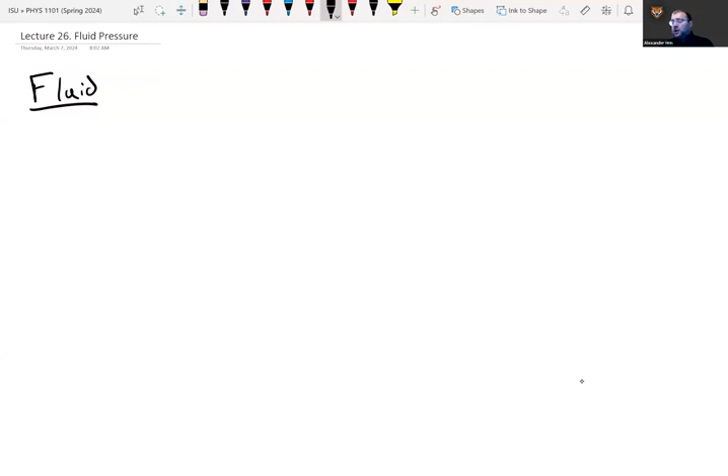A lot of people, when they hear the term fluid, what they think is liquid. Really, what it is, is liquid or gas. What a fluid generally means is that it engages in fluid flow. Basically this means it's matter that can rearrange its shape in order to fill the container, and when it moves, it rearranges its shape to move in whatever way possible. So its motion and its equilibrium have to take into account the fact that the matter can effectively change shape very easily. In fact, it changes shape in response to forces, and this has various implications in terms of the different kinds of fluid flow and fluid behavior.

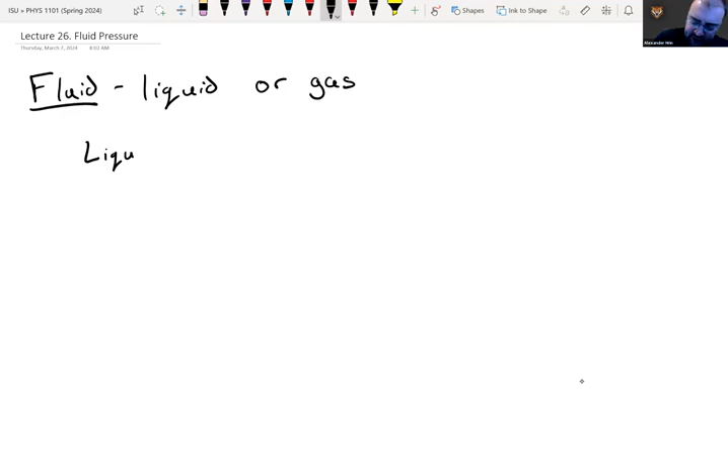So think about it this way: you have say a basketball. You can kind of keep pumping air into that basketball, and basically what you're doing is compressing the air to pump it in. If you've ever completely overinflated a ball, you know that eventually you can rip the ball apart. Now, if you tried to force water into that ball, you would basically fill it up until it was full of water, and you would not need very much more water to completely rip the ball apart. The idea is that you can force more air into the same volume—that's what it means to compress it. You can't really do that with water, okay?

That's in general the distinction between liquids and gases in fluid terms. When you think about liquids and gases, you probably have a better idea—liquids are heavier than air, and so they sit below any gases. Now, you can have some very dense gases, which can be interesting, but in general, liquids are more dense than gases, and we'll get to density in just a moment.

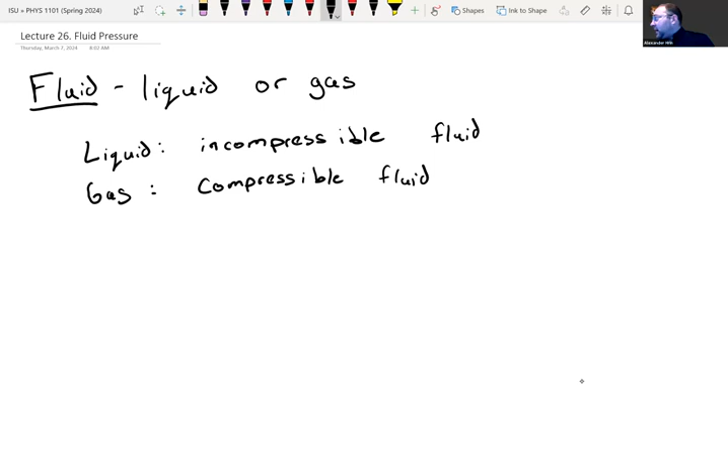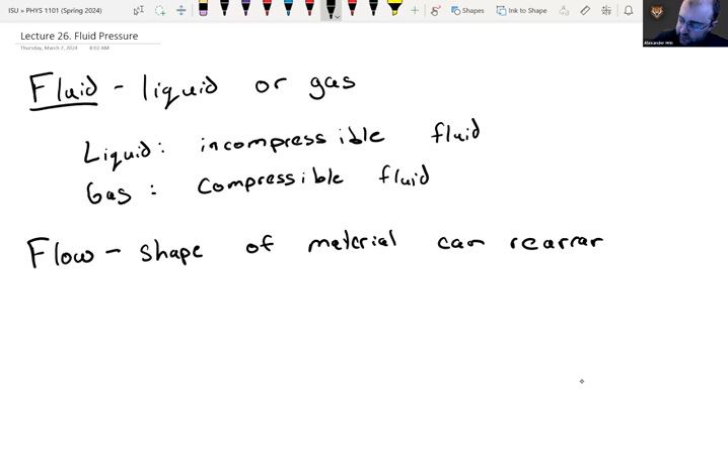So again, the idea is that both of these things flow, and the whole idea behind flow is that the shape of the material can rearrange to move, broadly speaking, to equilibrium. The idea here is that if we have a solid object, its shape can't rearrange, so it'll just sit there. Imagine your computer, it just sits on the desk. It keeps its shape—it's got forces on it, but the forces holding the shape together are stronger than anything that wants to rip it apart, like gravity or a normal force.

In the case of a liquid, that's not true. If you pour a liquid out of a cup, it doesn't stay the same shape as the cup—gravity basically flattens it all out. Same thing occurs with gases. You can see this sometimes if you go to the freezer aisle in a store, and you can see the cold air is kind of misty. You open the freezer, and you get a whole bunch of cold air that is actually visualizable, and that cold air will just flatten out along the ground.

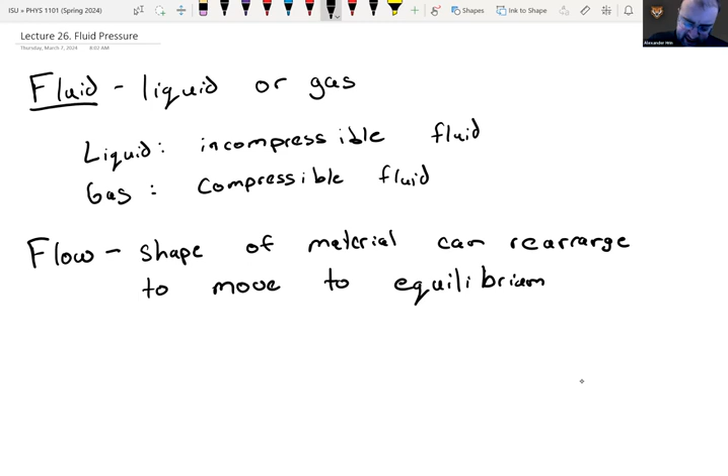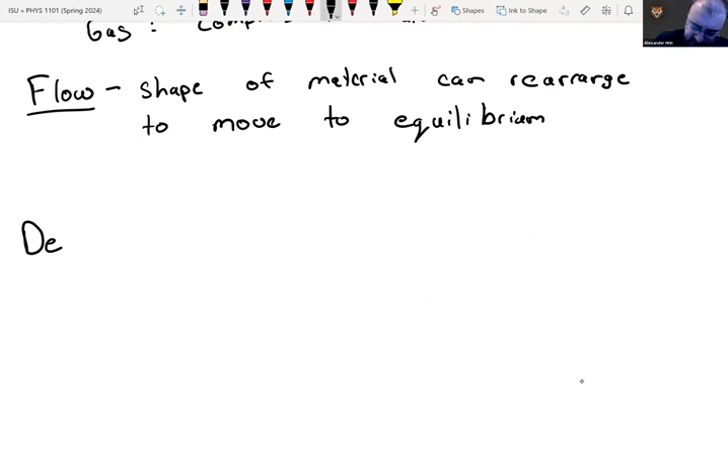Okay, so again, changing its shape in order to reach some equilibrium point—this is what fluids can do. As a consequence, a lot of the physical laws we learned about motion of solid objects we need to rethink and reconceptualize in terms of something that works for fluids. Now, we're going to need to define some new concepts that are going to keep coming up in fluids, and that's largely what's going to happen today. The first one is density, and perhaps you may be familiar with this—because a particular fluid can always change its shape, a lot of times it makes more sense to refer to the density of the fluid rather than the mass of the particular fluid, okay?

Because this fluid can change its shape, it can break apart, it can do whatever, the density is going to stay constant even if the fluid changes shape or spreads out. But what we can do is characterize the density of a fluid in a way that's a little more difficult to do for a mass, because a solid object's matter coheres together, so we can talk about the mass of that object, and also the density, but mass tends to be somewhat more effective.

Density is mass per unit volume. We talked a bit about this when we discussed drag, where the density of the fluid came up. Drag is a force that enters into fluid flow really, and we discussed it in the context of mechanics, but really people started analyzing drag once they understood a bit more about fluid mechanics instead.

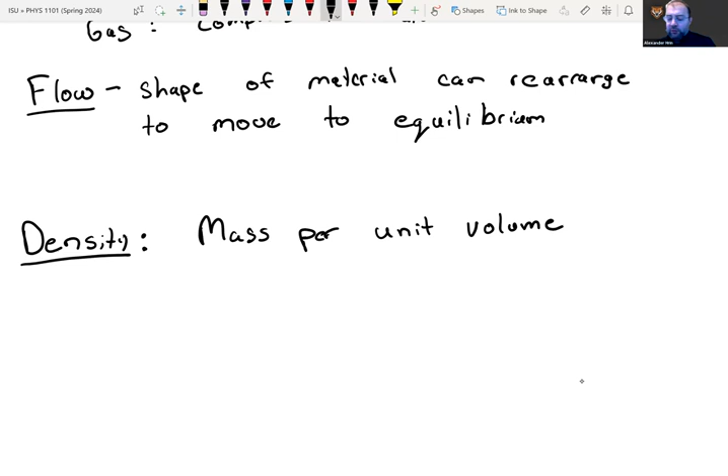So mass per unit volume, the symbol is this kind of weird looking P - that is the Greek symbol rho. A lot of times you'll have a subscript to indicate what it's the density of, but in general it's just this weird looking P. I'll try to put a tail on it to show it's not exactly a P. It equals mass divided by volume - that's not velocity, it's volume, supposed to be a capital V. Capital V's and lowercase v's look identical unless you're looking at a textbook, which is one of the things that can tell you it's a textbook. But if you're writing it, a lot of times they look identical. This is volume, so mass and volume.

Now the SI units are kilograms per meter cubed.

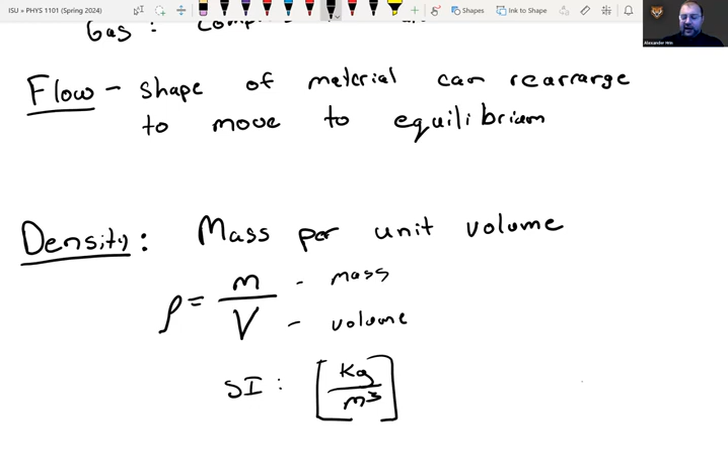This is SI, and one thing you need to be aware of is that a lot of times you won't be given SI for density. The reason is a meter cubed is a very large volume of something - particularly in the context of chemistry, that didn't come up a lot, you weren't dealing with entire meters cubed. If you imagine a meter cubed, it's a cube with a meter on each edge - that's a pretty big volume. We can deal with that, but it turns out a centimeter cubed is more common.

Now, a centimeter cubed is 1 milliliter - I'll put this off to the side. 1 centimeter cubed equals 1 milliliter. That is a conversion to know. Another common conversion to know is that 1 meter cubed is equal to 1 million centimeters cubed, or 1 times 10 to the 6th centimeters cubed.

And you're like, wait a minute, there's 100 centimeters per meter. Well, that's true, but if you imagine that meter cube on each edge and you divide each one of those edges into 100, basically the number of centimeters cubed that fit into that giant cube - you'll have 100 along one edge, 100 along another edge. That means 100 times 100 just on the bottom level, and 100 times 100 is 10,000. So just on the bottom level you have 10,000 centimeters cubed. But then you need a stack of 100 of those levels.

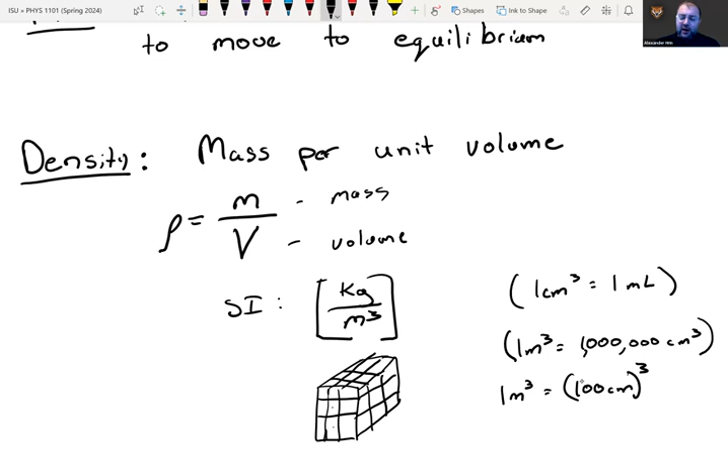One density I want you to be aware of, a very common density - this is actually how I think a gram was ultimately decided, because water is so common. I think a meter was decided another way, like some fraction of the distance from Paris to the North Pole. But a gram was decided in such a way that the density of water is equal to 1 gram per centimeter cubed.

That's the density of water, just to make that clear. Now, another conversion factor to know, since you're given things in grams per centimeters cubed, I'm going to convert this to kilograms per meter cubed, because kilograms per meter cubed is the SI unit. In a lot of SI applications, if you want to use density, you've got to convert to that. So know how to do it - it's not that hard. I just want to convince you of what's going on here.

So we'll do this conversion first. We have 1 million centimeters cubed per meter cubed, so basically this would be 1 million grams per meter cubed. But we also have a kilogram equals 1,000 grams, so we can change that as well. This 1,000 cancels out with 3 of those zeros. The grams cancel, the centimeters cubed cancel with the centimeters cubed - whoops, I canceled the meter cubed, I did not want to do that. Then we just have kilograms and meters cubed, and that would just be 1,000 kilograms per meter cubed.

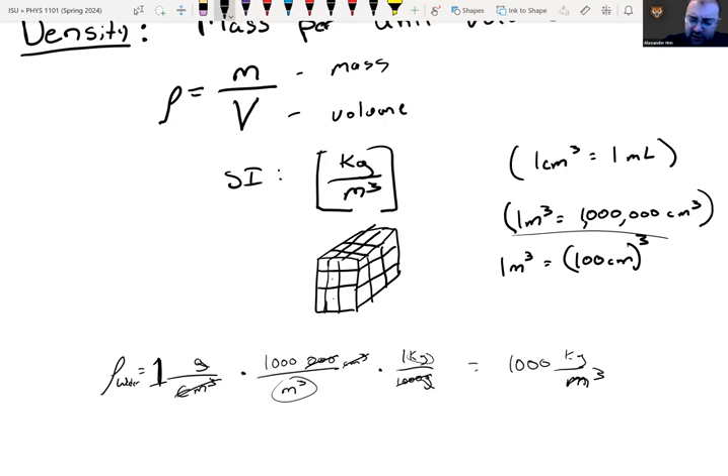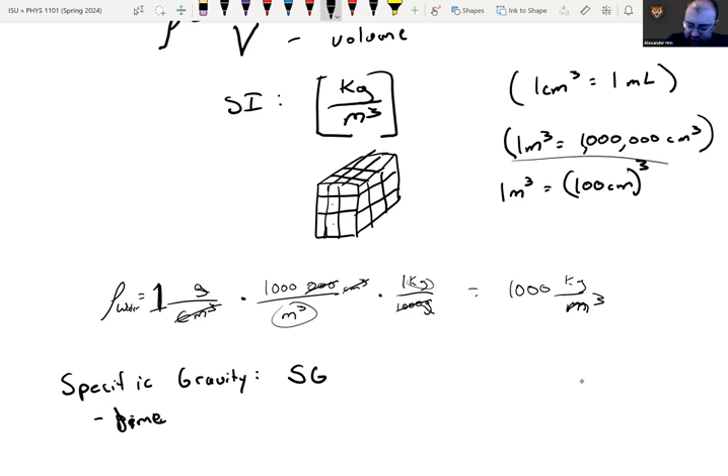So in any event, that's the conversion factor. Now, one other thing to talk about in this context is something called specific gravity. This doesn't really have a symbol - it will sometimes be given as just SG. Really, it's a dimensionless way of expressing density. Basically, the specific gravity of any fluid or object - say the specific gravity of X, where X could be anything - is equal to the density of X divided by the density of water. The nice thing about this is that the specific gravity is just the density of the material in grams per centimeters cubed with no units. So you can always find a specific gravity - it's a comparison of an object's density to the density of water. The reason this is often useful is that knowing the specific gravity, knowing how it compares to water, will actually tell you if something floats. I don't think this is going to come up much in the problems we're going to do, but it's worth knowing, so I'm going to include it.

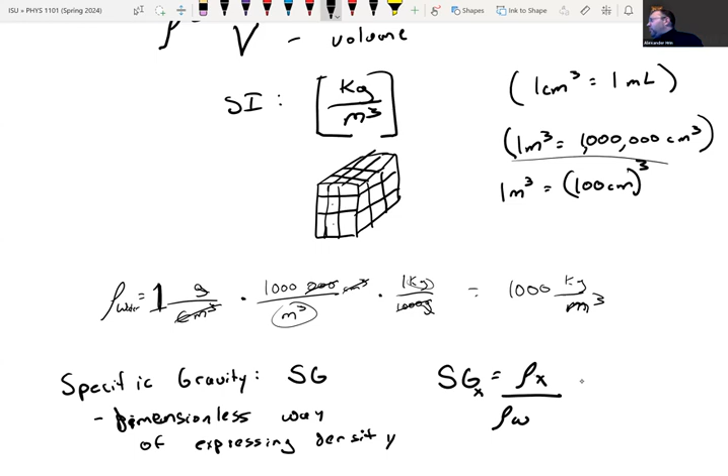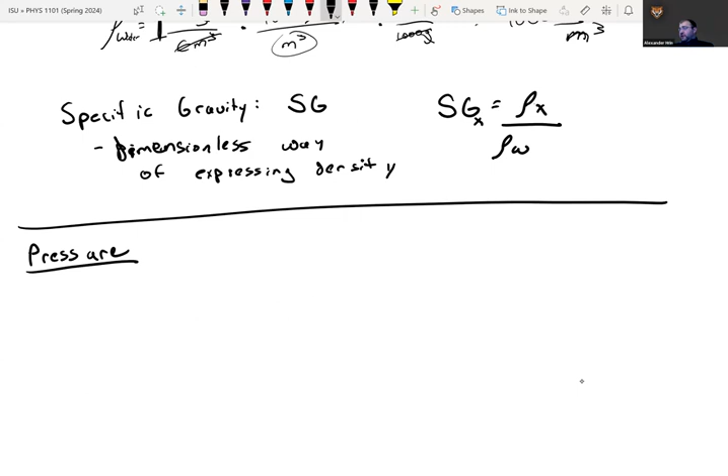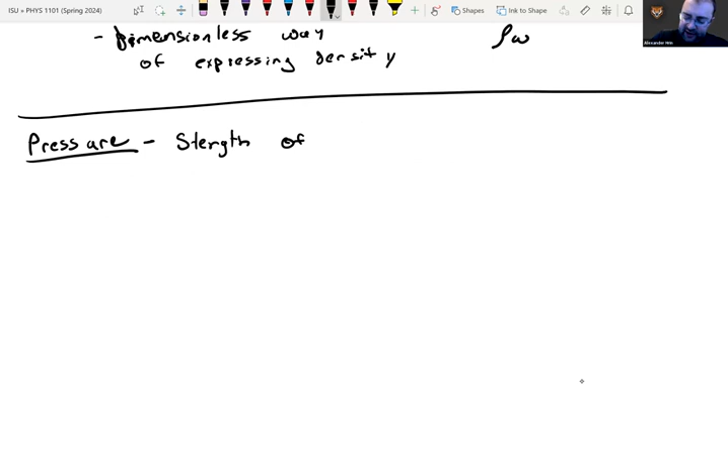All right, next concept I want to talk about is pressure. Pressure has a number of different ideas behind it - it's first relevant towards fluids, and then we can start thinking about it as a general application of forces. So when I introduce the concept of pressure, you've probably seen measurements of pressure before, but you might not have a very clear definition of what it is. The way I like to think about it, it is the strength of the push from a fluid.

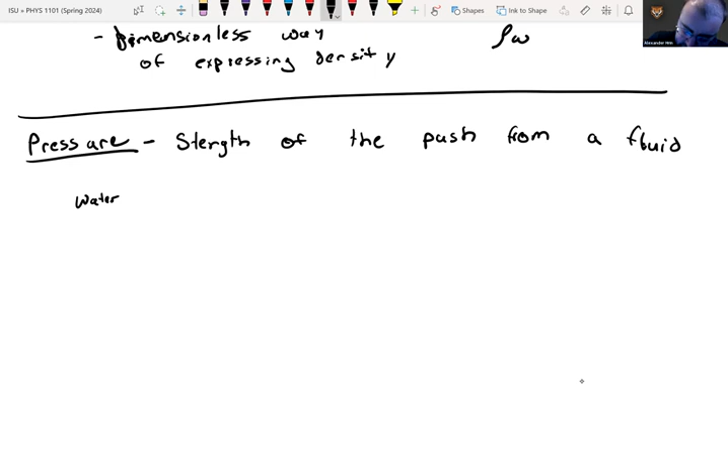Now, this has certain implications that are a little bit different than the strength of a push from an object, okay? And the idea is that if you were to have something like a water tank, just draw a big water tank, it's full of water, and we'll fill it in with water like so.

The idea here is that this water is pushing outward against this tank because this thing can rearrange itself. There's nothing like if this was a block of ice, the ice would not be really pushing against the sides of the tank. It might, depending on how it was frozen, but in general, if you just put a block of ice this normal size inside this tank, yeah, the ice would be pushing down, but it wouldn't be pushing on the sides of the tank because it would be held together internally.

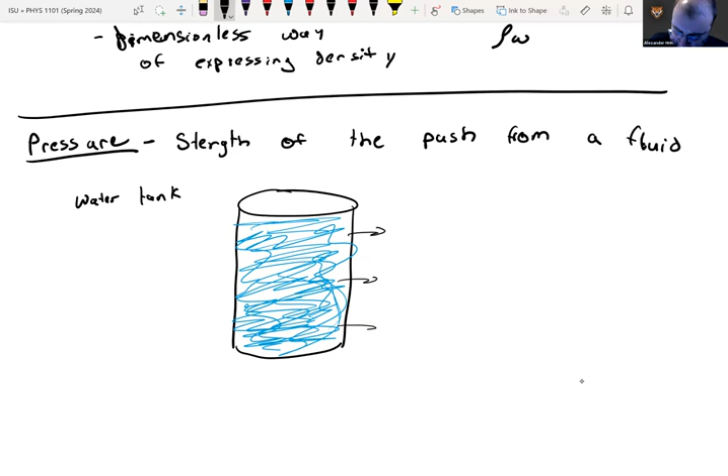Now, water is different. Water not only pushes down, but it pushes in all directions. So the idea here is you get these pushes out in this direction, and those can be thought of as forces. But the fact that water pushes on all the edges of the tank as well — that's the push from the fluid.

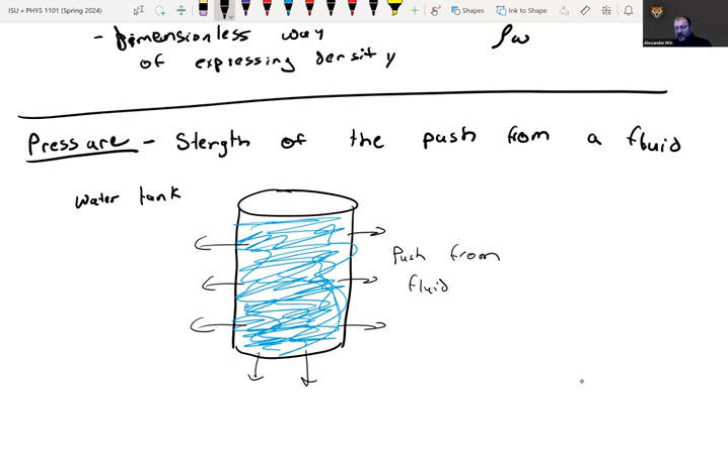The idea there is that we want to have a way to quantify the strength of this fluid, and we do that via pressure. Okay, so that is the idea. Now, ultimately, there's a couple of characteristics. Pressure, and in particular fluid pressure, pushes in all directions. Okay, this is one thing that ends up being pretty important.

The fact that this is the case, we'll get into this in a little bit, but the fact that this is the case is one of the reasons why, like a person, if this tank was like, I don't know, 30 feet high, a person could swim to the bottom and still be under most of the weight of the water, and they'd more or less be fine.

Like if you've ever swum down to the bottom of something fairly deep, you do feel a little bit different. Like you can feel it pushing on your ears and anywhere there's air in your body, you can kind of feel it pushing there. But it's not gonna kill you to swim 30 feet down.

However, if you took this person outside the water tank and put them underneath the water tank, that would crush them. Okay, that would completely obliterate them. All right, so a big part of that is even though you are still under most of the weight of that water, it's not just the additional weight of the tank.

Even though you're under most of the weight of the water, the fact that the pressure is pushing in all directions is keeping you from getting crushed from all the weight of the water above you. All right. Now, again, it does still have an effect, and we'll talk about that, but that's kind of what's going on.

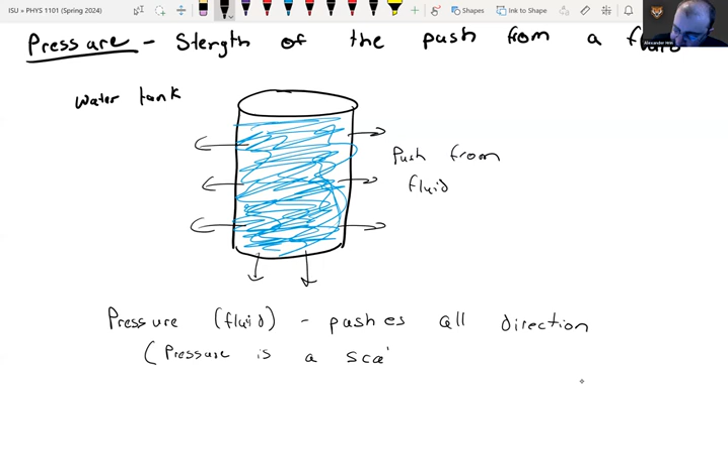Now, the other thing is the strength of the push of the fluid. It pushes in all directions. What this means fundamentally is that pressure is a scalar. And the idea here is we think about it, okay, it's a force and force has direction, but what pressure is doing — it's related, the only thing that generates pressure is like a force perpendicular to an area. So basically, we define both the area, the direction of the force, and basically direction perpendicular to the area.

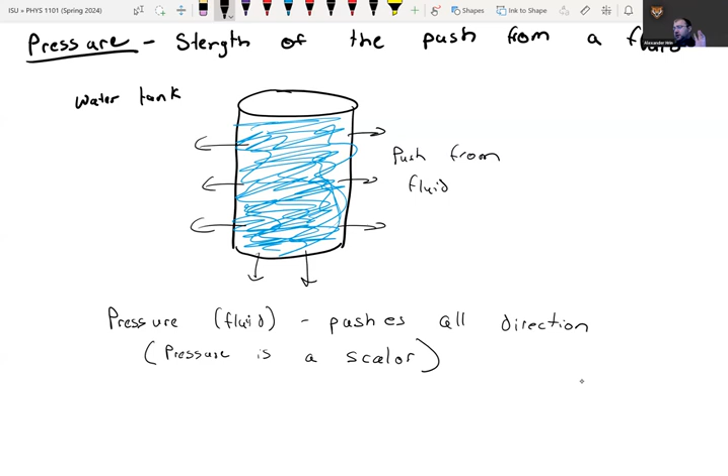And they have to be in the same direction, which is how it becomes a scalar. Now, how that works out in vector math, that's what we call a dot product. I wouldn't worry too much about that. Just know that pressure is a scalar.

Now, a big part of this was, okay, we want to relate pressure to force. Okay, so what is — if we have some fairly reliable ways to increase pressure, like we can increase the depth of a water tank, that increases the pressure down at the bottom. We know that. We'll get to that in a minute. But the thing is, how does

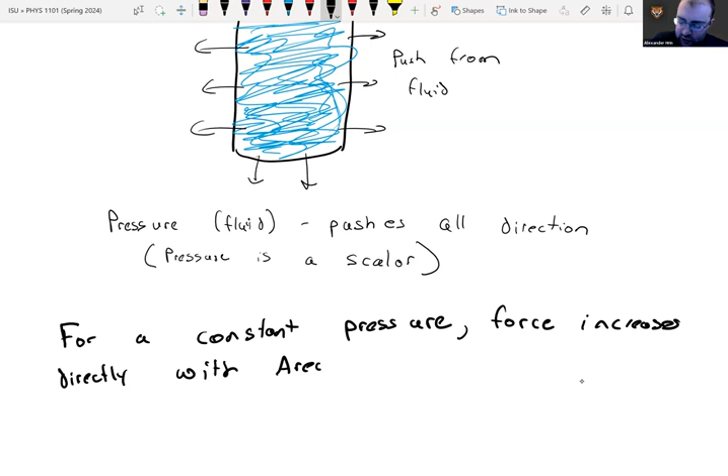pressure relate to force? And the idea here is that force, we'll just say, for a constant pressure — I'm going to do this in bold because it's worth doing — for a constant pressure, force increases directly with area.

Okay, so the way you can think about this is like if you have this 30-foot water tank and you had a little pinhole in it, you could fairly easily exert the force with your hand to plug that pinhole, even with all that water above it. Like you'd have a massive amount of water that you're basically holding in with your thumb. But as long as it's a pinhole, you don't actually need that much force to do it. However, if that hole was like a door the size of a meter, there'd be no way you could hold that back.

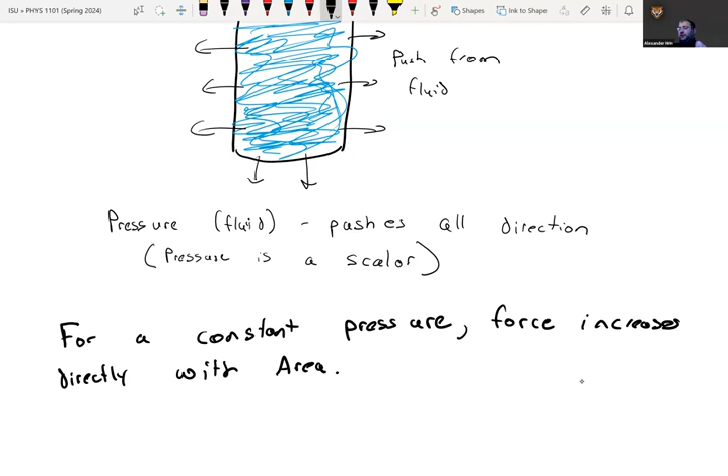It would be pushing on you way too hard. You could lean into that with all of your strength and you wouldn't be able to hold that back if it was under 30 feet of water. So the idea there is that force increases directly with area.

This brings us to the equation that pressure is equal to force per unit area. And the idea is this can be rearranged to force equals area times pressure. So as area increases, it increases directly with force if pressure was constant.

Now what this means is pressure can be found for any force, and you can increase pressure not by just increasing force, but by decreasing area. So this is something worth noting. Pressure can be calculated for any force.

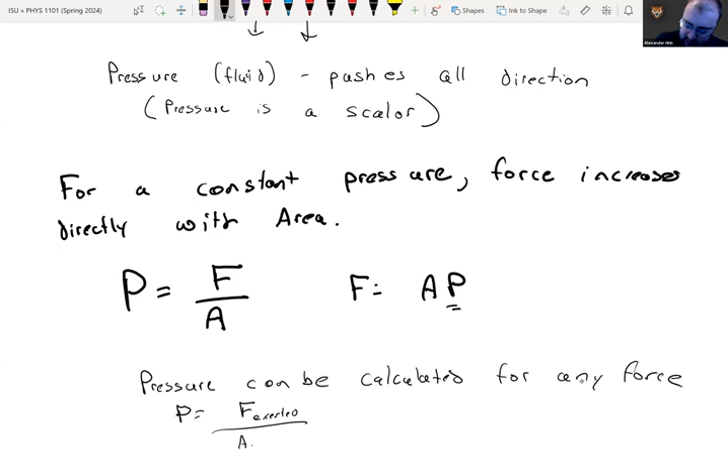If you think back to when we were talking about stresses and strains, this was basically a pressure measurement on particular objects. So pressure can be calculated for any force, and again, it's just the pressure equal to the force exerted divided by the area of exertion.

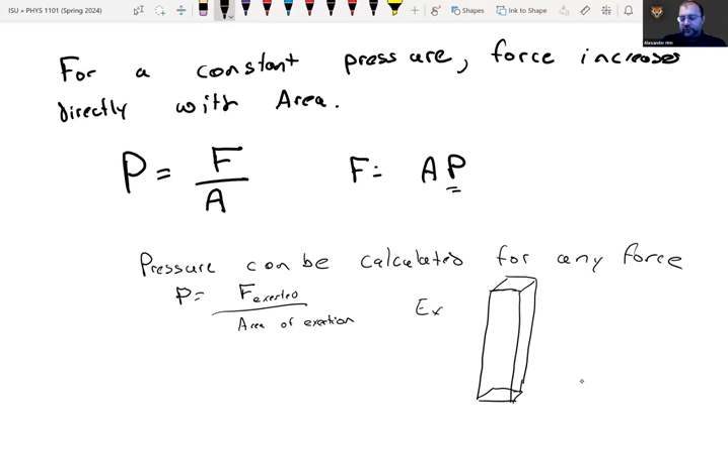So the idea here is, just for an example, if you have like we'll do a tall box, kind of like so. And then it has a mass of M, but then you put the box on its side, and they both have the same mass.

This has more pressure, and the reason is it's the same mass, so the same weight, but exerted over a smaller area if it's sitting on a table. This one would have less pressure. The idea is that more pressure is actually more likely to break things. So there you'll see a couple of examples like that.

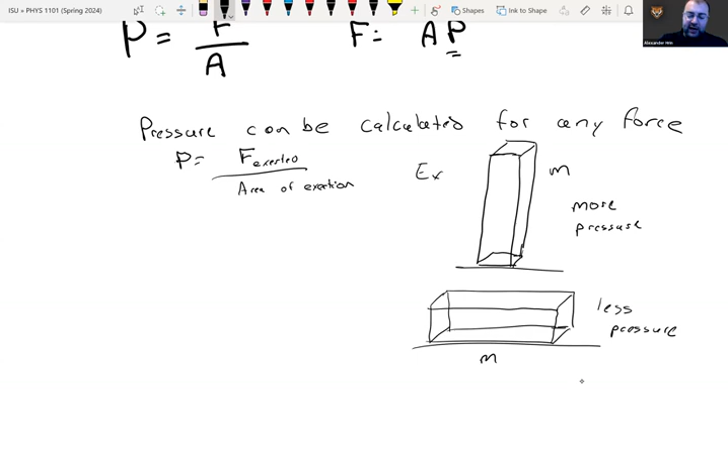Now, when it comes to the units of pressure, pressure can be measured in many different ways. The SI unit—remember the formula is pressure equals F over A—so the SI unit is newtons per meter squared.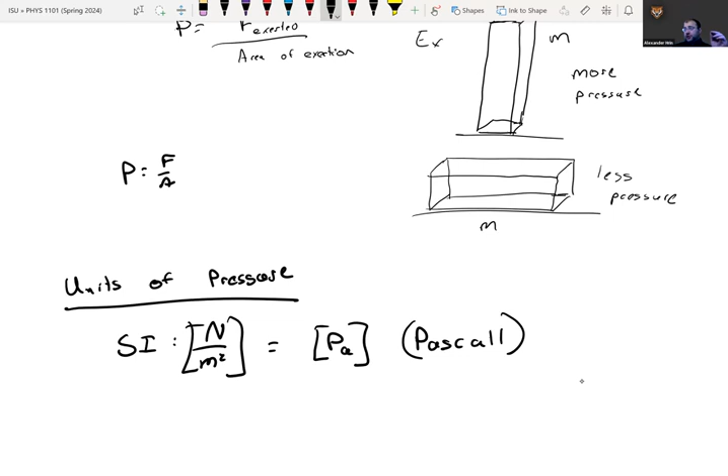And this we derive, we call the symbol PA, that is for Pascal. So the SI unit of pressure is the Pascal, but there are several other units of pressure.

One of them is millimeters of mercury, so you might see this written as millimeters Hg. Now, the reason millimeters of Hg is used is because this was actually one of the first ways that pressure was ever measured, and it was atmospheric pressure.

I think it might have been Pascal who did this. Either Pascal or Torricelli, I don't remember. I think it was Pascal. But anyway, what he did is he managed to get a cylinder full of mercury.

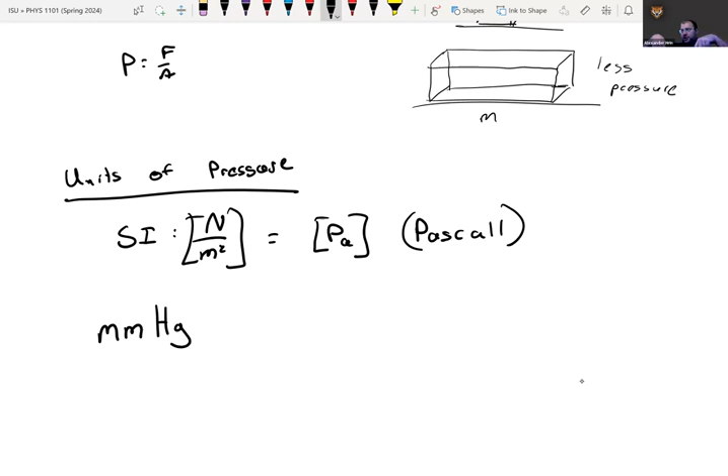He kept it sealed, and he dumped it over such that the top was in a puddle of mercury. And what he saw is that some of the mercury would fall down, but it wouldn't fall down all the way. Basically, what was going on is the air pressure from outside was holding the mercury up.

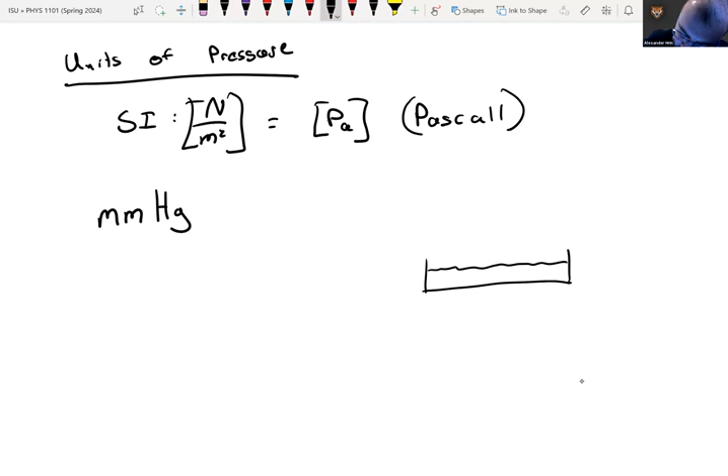So the idea here is, well, if you have this thing, and you have—so this is all mercury, Hg—and then you have a little tube going up like so. I'll color this in purple. Mercury isn't purple, it's silver. If you've ever seen mercury, it's kind of cool.

But the idea here is that what you would have is it would stop at some level, okay? And in here, this would not be air, this would be a vacuum. And basically he could ensure that was vacuum just by having the tube filled initially and not letting any air in.

So if you ever get a chance, you can see this effect with water—though you can't actually see it empty with water, it's quite difficult. But if you're washing dishes sometime, fill a glass up with water, keep the glass underneath the water with the lip submerged, and start to lift the bottom out. What you'll see is the water will stay in the glass. It will fall once you break it and allow air in, but before that, the water just stays in the glass. It's kind of an interesting little phenomenon.

And the idea here is basically what he saw is that this could be used to measure pressure. Now another thing he saw is that on average at sea level, he had 760 millimeters of mercury on an average day. And if it was less than that, he said okay, the pressure has gone down. If it was more than that, he said okay, the pressure has gone up.

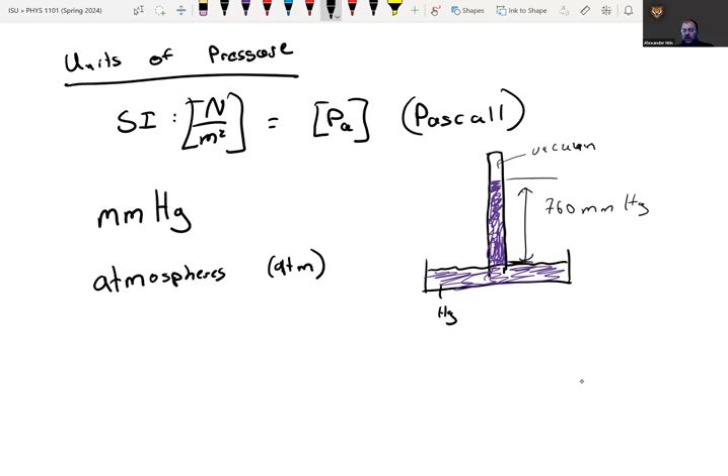I'll give you a straight conversion between all of these. 1 atmosphere is equal to 760 millimeters of mercury, and that is equal to 101.3 kilopascals. 101.3 kilopascals is just 101,300 pascals, roughly. 4 significant figures is enough.

So this is the unit conversion that you will need to know, and you will see these things come up. All 3 of these units will come up when it comes to pressure.

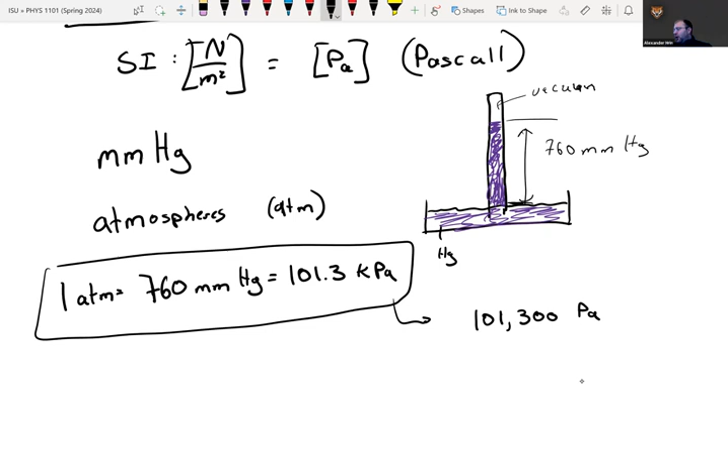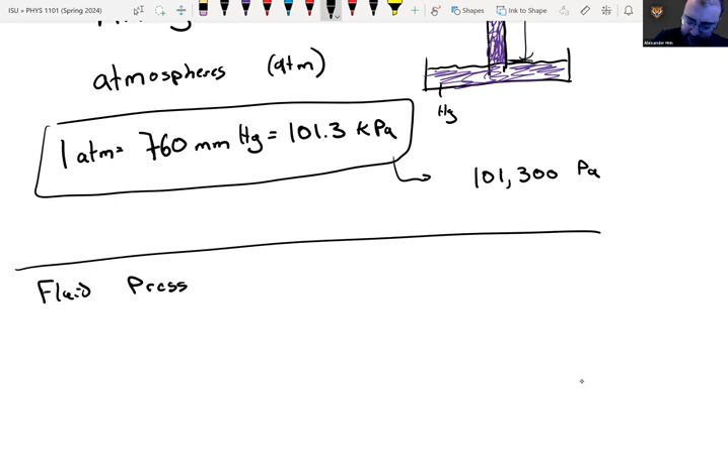Now, one other thing I wanted to talk about is the fluid pressure derivation. Basically what this comes from is it's going to be the weight of a fluid per unit area.

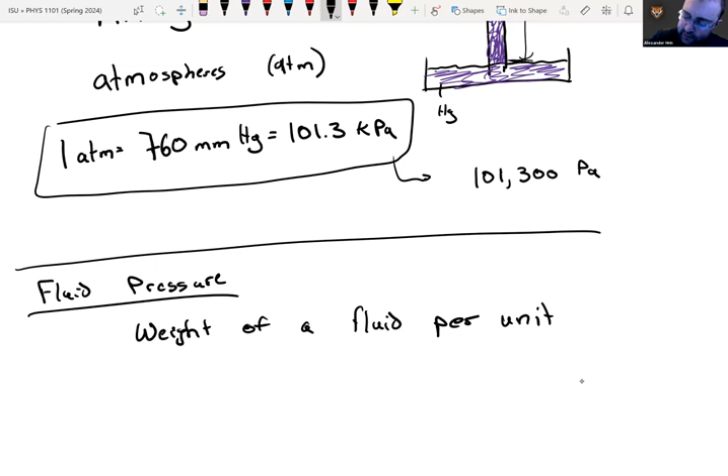The very simple way to do this is if you have a tank of whatever fluid, we could say water, but I'm just going to say it's a general fluid. This tank of fluid has some fluid pressure that it's exerting. Basically, if you were to poke a hole in the tank, fluid would get forced out, and that's because the fluid has a pressure.

Now we'll say that the fluid just has a density, we'll call that the density of the fluid. And then we'll say this distance right here will be height. If we want to know the pressure at the bottom, so pressure bottom...

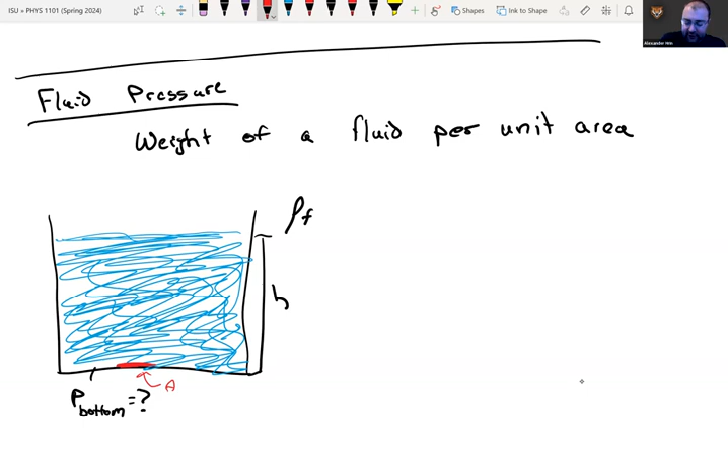Basically what we're going to do is take a little patch, I'll do this in red, that has an area of A down at the bottom. Area equals A. And what we're going to do is figure out the weight of the fluid above it. So we want to know F sub G of this fluid, this column of fluid in red that I've drawn. We want to know the force of gravity.

We're going to divide that by A. Well, we can start doing this derivation. So we can say, okay, the force of gravity of the fluid is just going to be the mass of the fluid times G.

Okay, cool, but we don't know the mass of the fluid. We do know the density of the fluid, so we can go from there. Reminding ourselves that mass divided by volume equals density, this means mass is equal to density times volume. So we can make that substitution: instead of mass of the fluid, we convert this to the density of the fluid times the volume of the fluid times G.

Now, one other thing we can realize is that the volume of this fluid is just going to be the area of that patch down at the bottom times the height. I'll rewrite that in red so we know where that comes from. Whatever that patch is, it could be a circle, could be a square, it's just a sample patch. The whole idea is that it actually cancels, that's why we can use any area that we want.

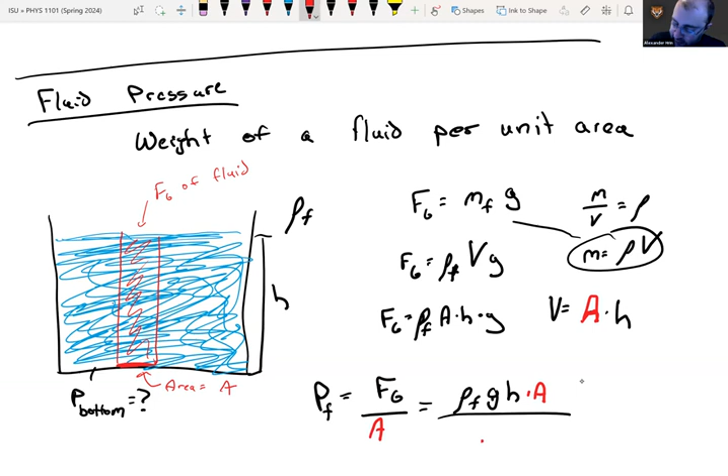Now what we want to do is find the pressure at the bottom, I'm just going to call this the fluid pressure. It's the force of gravity of the fluid divided by the area of that patch. Once we substitute in, we get the density of the fluid times G times H, rearranging a little. We have the area of the patch in the numerator and the area of the patch in the denominator, and those two cancel, and we end up with a very simple formula for fluid pressure.

The fluid pressure is equal to the density of the fluid times G times H. This is the fluid pressure formula. Now, I will say this does make an assumption: it assumes that the density is constant all the way down. Like when we calculated that mass, we had to assume that the density is constant. This assumption works well

for liquids, not as well for gases. The reason is that a gas is more dense down at the bottom. So if you think about the Earth's atmosphere, the gas is more dense at sea level. The atmospheric gas is more dense at sea level than it is at elevation. That's something worth keeping in mind.

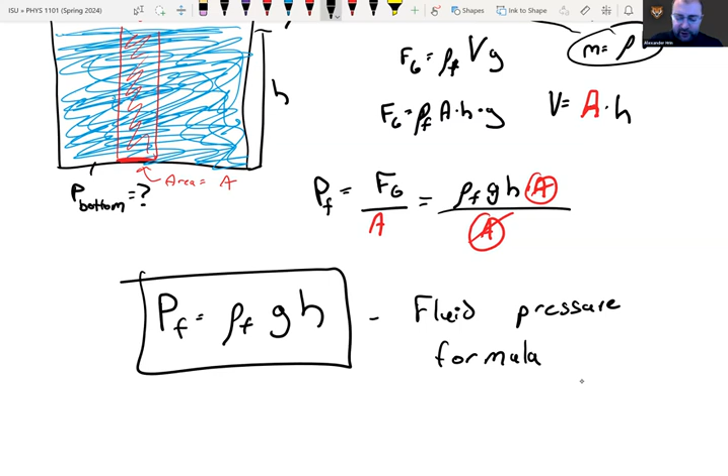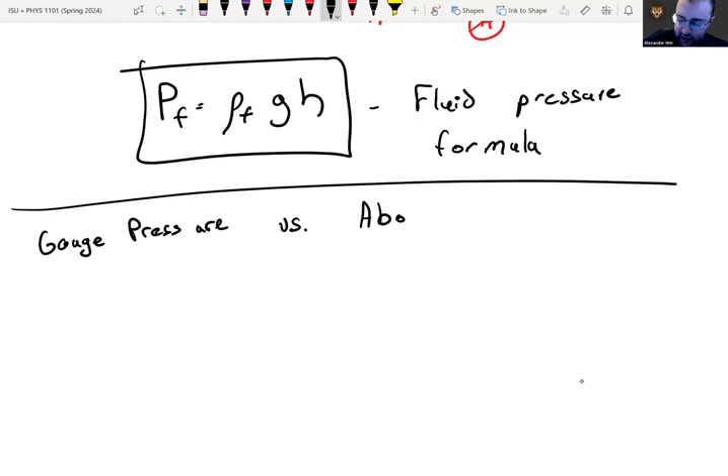Now, last thing I wanted to discuss here in this lecture is gauge pressure versus absolute pressure. What most pressure devices do is they measure a force per unit area. So the way you could think about this is basically like a scale.

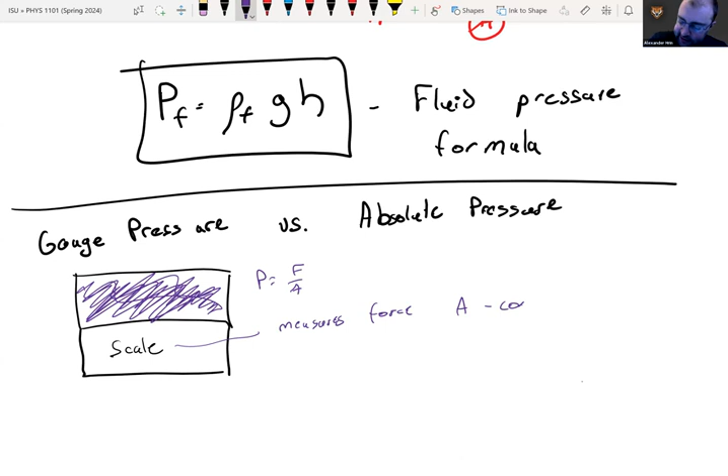Let's say we've got fluid in here that we're measuring, could be air, could be anything, and we want to know the pressure. Pressure is equal to force per unit area. This thing right here would be a scale that would measure the force, and it would have a constant area that wouldn't change. So the scale measures the force, and since the area is constant, you can convert directly from the force to the pressure.

But the issue with most tools for measuring pressure is what you have out here is air. The idea is that what you have down below is pressure from the air exerting an upward force. It doesn't matter if it's up or down, because air pressure exerts forces in all directions. So the measured pressure inside does not account for atmospheric pressure. The reason is that if the pressure of that purple fluid is exactly equal to atmospheric pressure, that scale is going to read nothing, because it's going to be balanced on both sides.

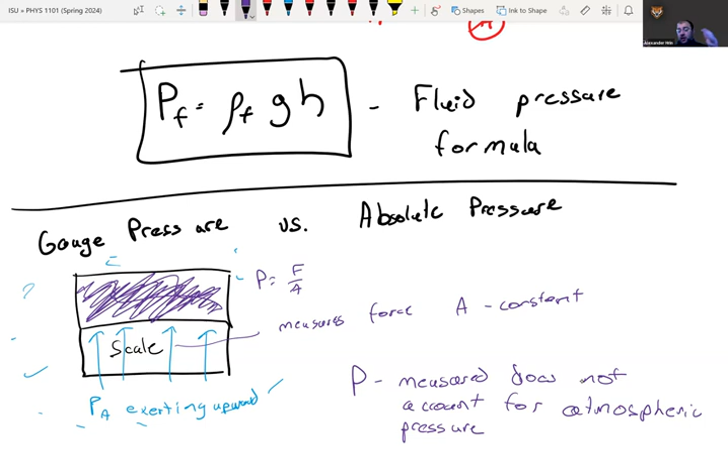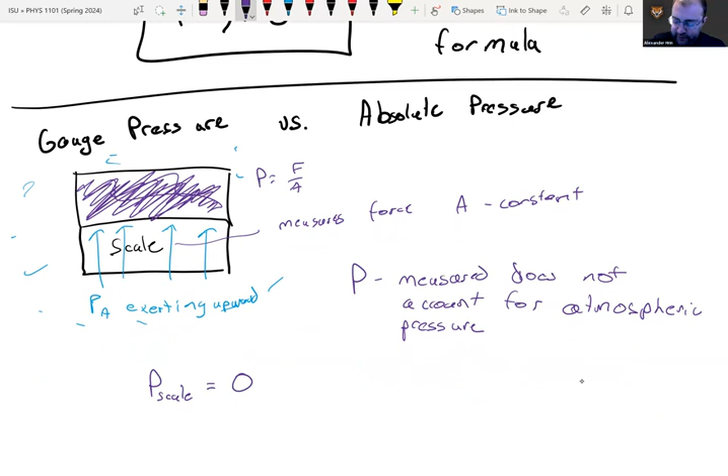So the scale is only going to measure things above atmospheric pressure, possibly below, if the scale can read negative numbers, it can measure things below atmospheric pressure. But the idea is that the pressure of the scale equals 0 if P equals P atmospheric. So we would call this gauge pressure: P gauge equals 0 if the real pressure is equal to atmospheric pressure.

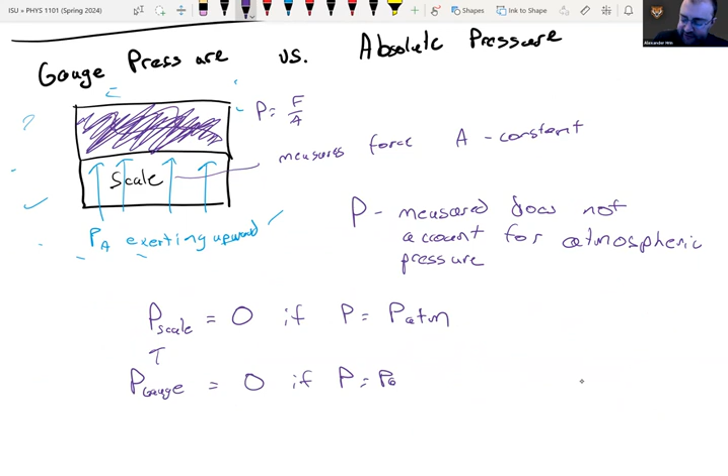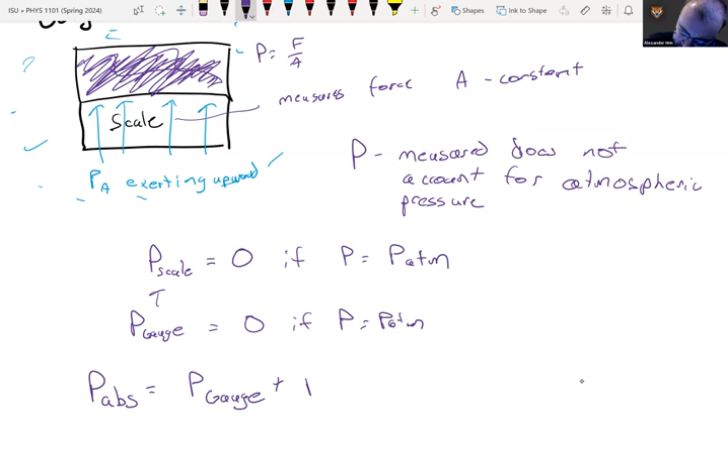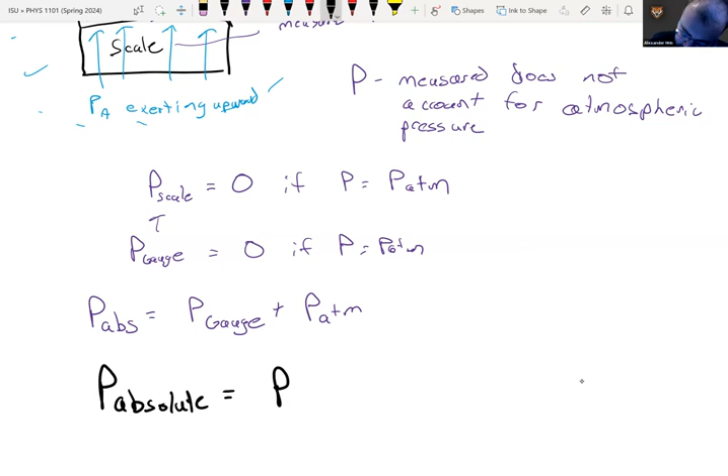So the idea behind these formulas is that if you want to find the absolute pressure, you take the gauge pressure, and this is how most tools measure gauge pressure. You could get a gauge to measure absolute pressure, but you'd have to have a vacuum on the other side, to make sure atmospheric pressure wasn't exerting a force on the other side. So P absolute equals P gauge plus P atmospheric, and P atmospheric is generally approximately 1 atmosphere. You can look up the conversion factor.

Now, P atmospheric will change depending on where you are, that's what can make this tricky. If you've ever filled your tires up here at about 4,000 feet, then driven down to sea level, there's less pressure in the tires. It's not because you necessarily lost air, though you might have. What happened is that what you are measuring your pressure against was lower, your atmospheric pressure was lower at higher elevation than at sea level. Another way to think about it: atmospheric pressure is pushing in on your tires a little bit more, so when you measure that against a gauge, it seems like there's less pressure in your tires because it's closer to atmospheric pressure. Your tires would still be inflated, but that's the idea behind atmospheric and gauge pressure.